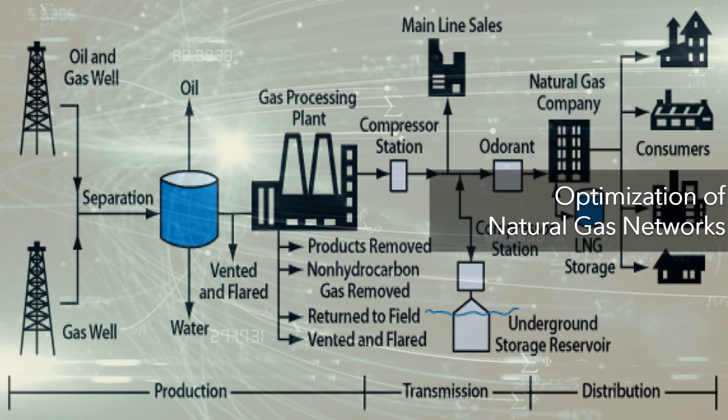Optimization of natural gas networks. There are many applications of mathematical models of optimization of natural gas system networks. Basically, for all applications the same model is used, from different points of view, which entails adjustments in the mathematical modeling. Some of the applications are: natural gas market simulation, natural gas market and system regulation, real-time optimization of natural gas pipelines, and optimization of natural gas systems.

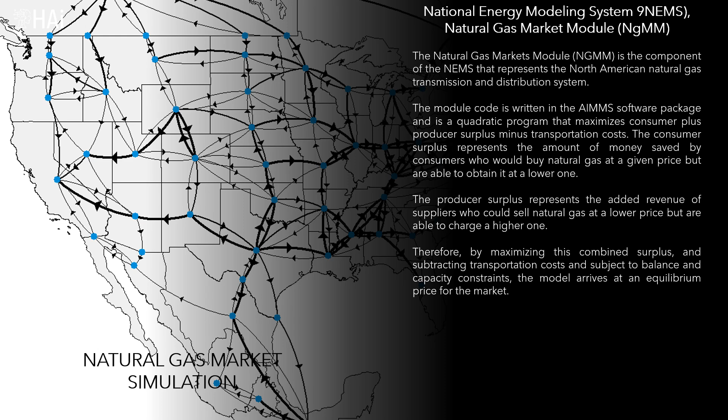The Natural Gas Market Module, NGMM, is the component of the USA National Energy Modeling System, NEMS, that represents the North American natural gas transmission and distribution system, and market. The module is a quadratic program that maximizes consumer plus producer surplus minus transportation costs. The consumer surplus represents the amount of money saved by consumers, who would buy natural gas at a given price but are able to obtain it at a lower one.

The producer surplus represents the added revenue of suppliers, who could sell natural gas at a lower price but are able to charge a higher one. Therefore, by maximizing this combined surplus, and subtracting transportation costs and subject to balance and capacity constraints, the model arrives at an equilibrium price for the market. The image presents the NGMM natural gas pipeline network.

Purdue University's SUFG, State Utility Forecasting Group, has supported experts from the Indiana Utility Regulatory Commission, IURC, since late 2001, with the goal of examining the impact of new electricity generating facilities within the gas system. The model determines the mix of purchasing, transportation, and storage decisions of local distribution companies, LDCs, which minimize the sum of purchasing, transportation, and storage costs over a 60-month planning period, subject to the following constraints.

Consumer demand at demand nodes must be met. The flow capacity of gas pipelines should not be exceeded. Storage capacity limits of storage sites should not be violated. The amount of gas transferred from one pipeline to another cannot exceed the capacity of the interconnection, and long-term purchases and dispatch contracts. The image presents the network topology of the gas modeling system.

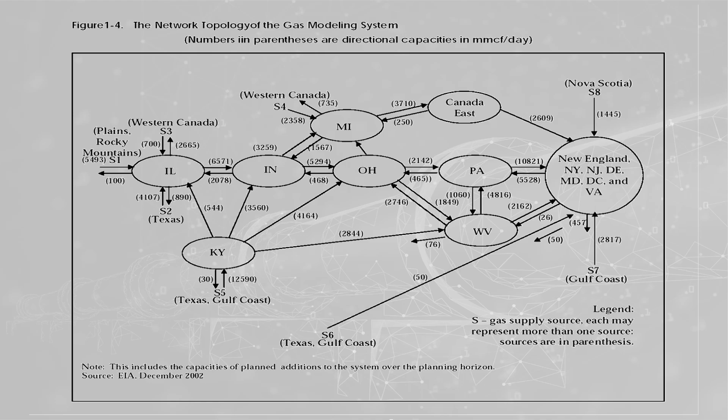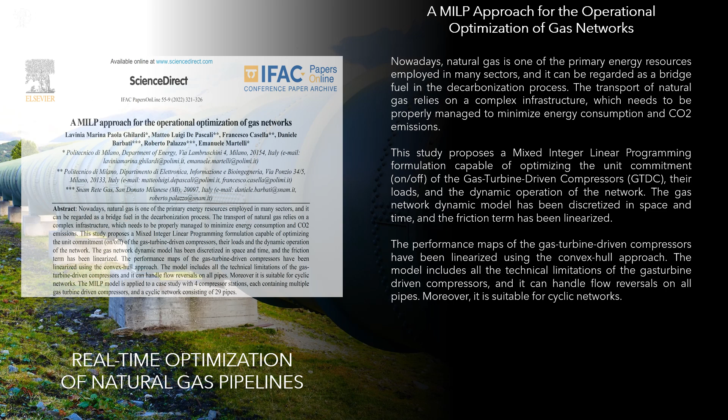Real-time optimization of natural gas pipelines. Nowadays, natural gas is one of the primary energy resources employed in many sectors, and it can be regarded as a bridge fuel in the decarbonization process. The transport of natural gas relies on a complex infrastructure, which needs to be properly managed to minimize energy consumption and CO2 emissions. The performance maps of the gas turbine-driven compressors have been linearized using the convex hull approach. The model includes all the technical limitations of the gas turbine-driven compressors, and it can handle flow reversals on all pipes. Moreover, it is suitable for cyclic networks.

The MILP model is applied to a case study with 4 compressor stations, each containing multiple gas turbine-driven compressors, and a cyclic network consisting of 29 pipes. In this case, the MILP model was used to optimize the 24 hours of unit commitment, with time resolution of 30 minutes, and sections of a maximum length of 200 kilometers. The continuous variables of the MILP are 18,816, the binary variables are 1,421, and the constraints are 43,429.

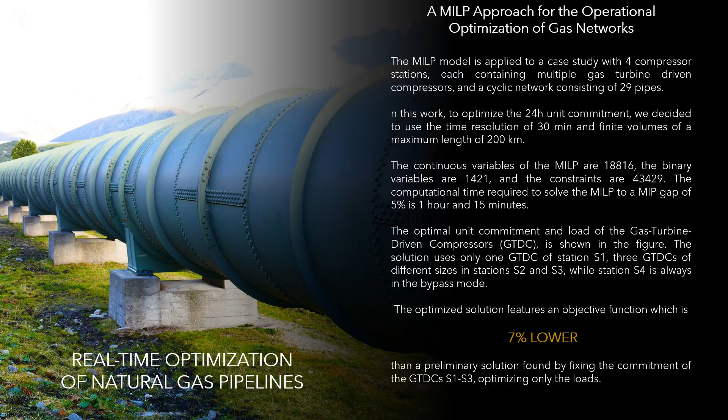The optimal unit commitment and load of the gas turbine-driven compressors, GTDC, is shown in the figure. The solution uses only one GTDC of station S1, 3 GTDCs of different sizes in stations S2 and S3, while station S4 is always in the bypass mode. The optimized solution features an objective function which is 7% lower than a preliminary solution found by fixing the commitment of the GTDCs S1 S3, optimizing only the loads.

Optimization of natural gas networks based on stochastic optimization. This model provides a review on the most relevant research progress related to the steady-state operation optimization models of natural gas pipelines as well as corresponding solution methods based on stochastic optimization algorithms. The existing operation optimization models are mixed integer nonlinear programming, MINLP, models, involving a non-convex feasible region and mixing of continuous, discrete, and integer optimization variables, which represents an extremely difficult problem to be solved by use of traditional monolithic optimization algorithms. However, no reference is made to advanced methodologies using large-scale optimization methodologies.

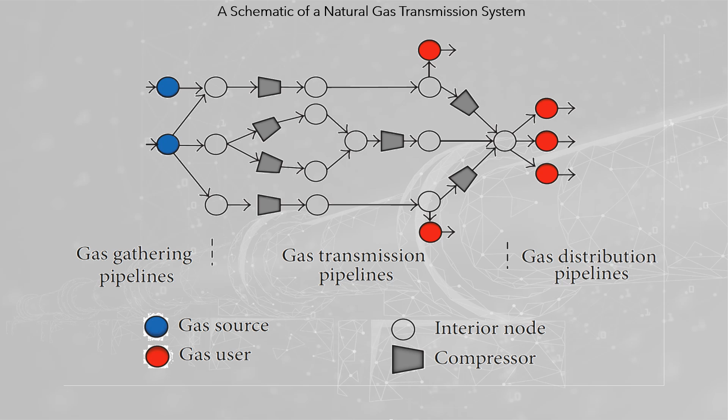A schematic of a natural gas transmission system can be conceptualized based on three subsystems: gathering pipelines, transmission pipelines, and distribution pipelines. The image shows a gas pipeline network composed of a tree and a cyclic network. The real-time model can handle differentiated electricity costs by time of day, or by load block, using this way to take advantage of low rates, or low marginal costs, in periods of electricity low load. A gas pipeline is a pipeline that allows combustible gases, natural gas, liquefied petroleum gas, to be transported on a large scale and over a long distance.

Pipelines planning and scheduling. The optimization model includes the following types of nodes: production fields, consumption center, natural gas demand nodes discriminated by demand sector, among which are industrial, vehicular, electricity generation, commercial, and residential, and ports and terminals that can receive and/or send LNG. It is associated with liquefaction and/or regasification plants.

Those interested in learning more about modeling gas piping systems are invited to watch the video. Oil pipelines optimization.

Electricity and natural gas integrated modeling. High Power integrates the following models.

High Electricity Supply Chain Optimization supports decisions in the electricity supply chain, in terms of sectoral planning and business generation. High Smart Grids Optimization supports the decisions of the various agents involved in the smart grids business. High Natural Gas Supply Chain Optimization supports the decisions of the actors involved in the natural gas supply chain, at the level of sectoral planning and business generation.

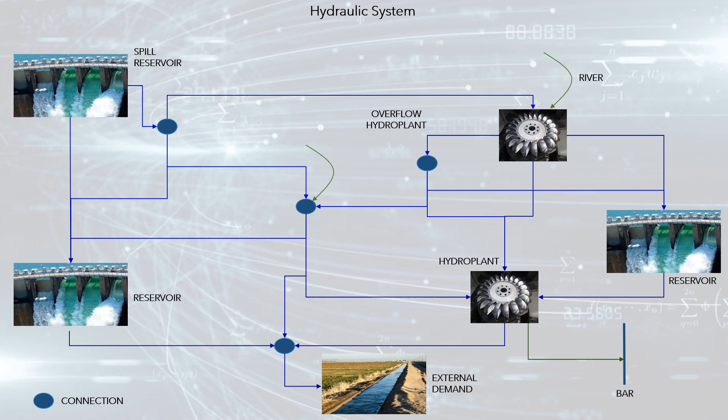The following is the topology of High Power. Hydraulic system physical modeling: High Water corresponds to a general model that includes all kinds of hydraulic components: reservoirs, hydroelectric power plants, rivers, overflow channels, connection points and pumping stations, demands like irrigation, aqueducts, environmental, industrial. Components can be freely linked to form any topology, like pumping storage systems.

Hydroelectric power plants are modeled independently of reservoirs, so plant-reservoir connectivity must be established. The regulation capacity of the reservoir is simulated in detail, so such a simulation consistently represents the dispatch of the power plants, considering their ability to regulate the multi-annual, annual, hourly water resource.

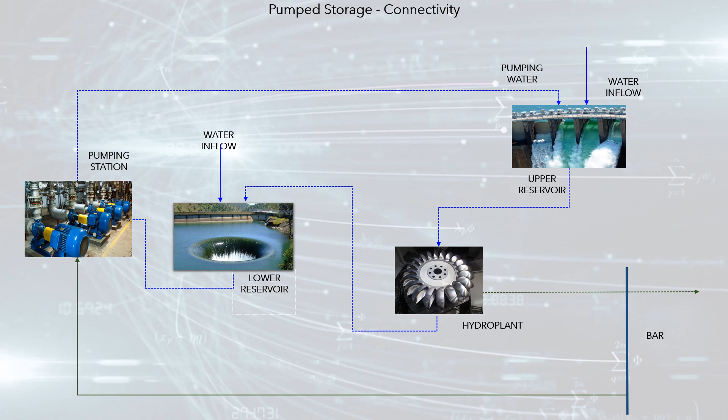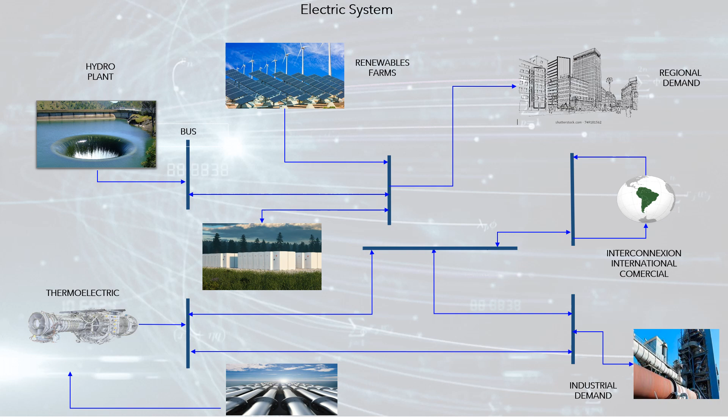Electric system physical modeling. Electrical connectivity is carried out through a network of circuits and bars that integrates different types of installations, power plants like hydroelectric, thermoelectric, coal, wind, solar, biomass, places of demand like industrial, cities, regional interconnections, and energy storages. High Power includes the simulation of several types of renewable energy sources and energy storages. For each type of electrical asset, High Power includes the exact equations for simulation.

Natural gas system physical modeling. High Gas describes the process of supply and demand of natural gas. From this point of view, its integration with the electricity system determines the economic equilibrium of electricity-gas markets.

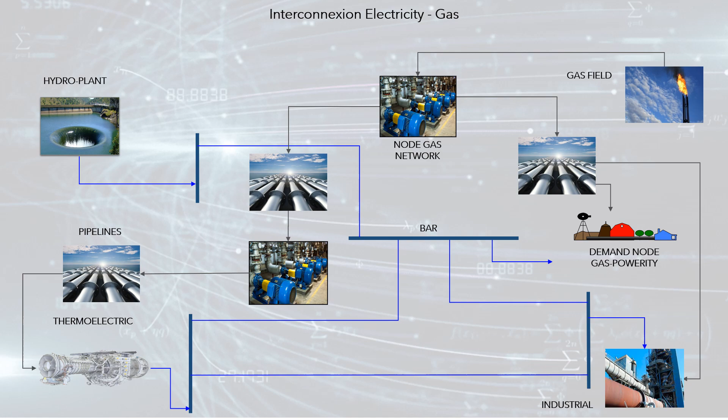The entities of the natural gas system are: nodes, which connect the gas system installations; production fields; consumption zones discriminated by sector, for example refineries, heavy industries, residential, vehicular, and commercial thermoelectric power plants; transport systems, including pipelines and multimodal transport systems using vehicles; pumping stations, which compress the gas to transport it; and ports, which receive and ship liquefied natural gas (LNG) and have gas storage capacity.

Connectivity between the electricity and gas sectors occurs through the demand for natural gas for use in thermal plants, and the substitution of demand that can occur between gas and electricity.

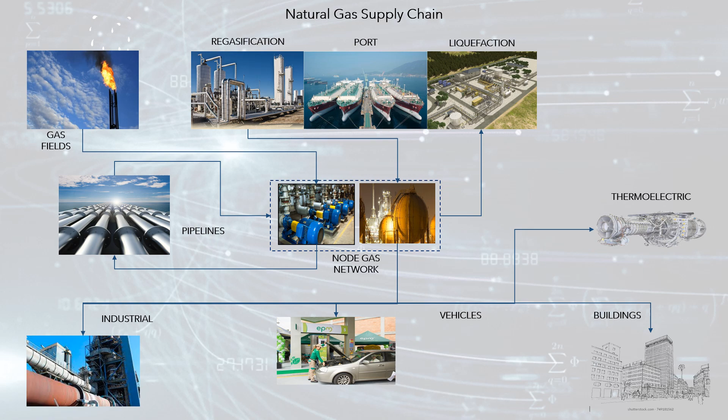High Power: autonomous optimization software for energy sector enterprises. It is an optimization decision support system aimed at agents acting in the energy sector, understood as the union of electricity, natural gas, oil, bio-renewable sources, and new non-conventional sources. For more information, interested parties are invited to watch the video High Power.

Use case: Oil Express Natural Gas Field Exploitation Planning. At the end of the last decade of the last century, Oil Express, a global natural gas company that operated several natural gas producing fields in multiple countries, asked High for support to define a natural gas field exploitation planning strategy, using highly complex mathematical models to analyze the entire decision-making environment.

The challenge was to develop a model that supported the decision-making regarding the exploitation of natural gas fields and its impact on Oil Express finances. Solution: design and implementation of a DSS for management of natural gas oil field strategic decisions, like the exploitation period.

The models included in the DSS were: electricity and gas economic dispatch simulation, optimization of the gas trading decisions, optimization of the financial and fiscal decisions, and financial simulation of the gas buyers.

Result: the SHTG model (hydrothermal and gas system), the first version of the actual High Power model. Based on High Power, Oil Express makes its decisions that produced successful results, leading to higher profits by delaying the exploitation of the gas field for an economically more convenient time, due to the non-sustainability of the market. People interested in the case can watch the video, Oil Express, Natural Gas Field Exploitation Planning.

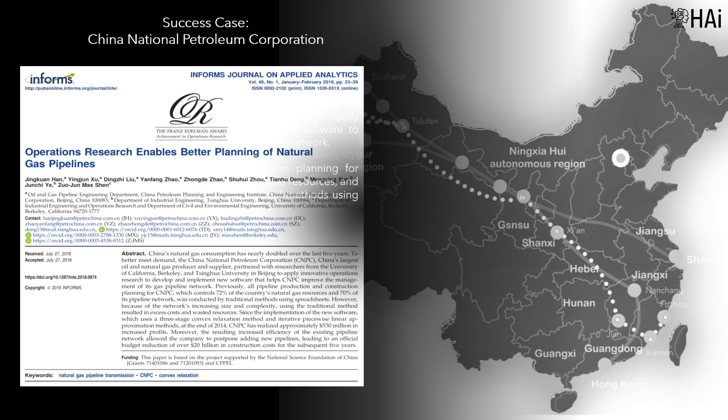China's natural gas consumption has nearly doubled in the past 5 years. To better meet demand, the China National Petroleum Corporation (CNPC), China's largest producer and supplier of oil and natural gas, partnered with researchers from the University of California, Berkeley, and Tsinghua University in Beijing to apply operations research to develop and implement new software to help CNPC improve the management of its pipeline network.

Previously, all pipeline production and construction planning for CNPC, which controls 72% of the country's natural gas resources and 70% of its pipeline network, was done by traditional methods using spreadsheets.

However, due to the increasing size and complexity of the network, the use of traditional methods resulted in excessive costs and wasted resources. Since implementing the new software, which uses a 3-stage convex relaxation method and iterative piecewise linear approximation methods, in late 2014, CNPC has obtained approximately $530 million in increased earnings from 2015 to 2017.

In addition, the resulting increase in the efficiency of the existing pipeline network allowed the company to postpone the addition of new pipes, leading to an official budget reduction of more than $20 billion in construction costs for the following 5 years.

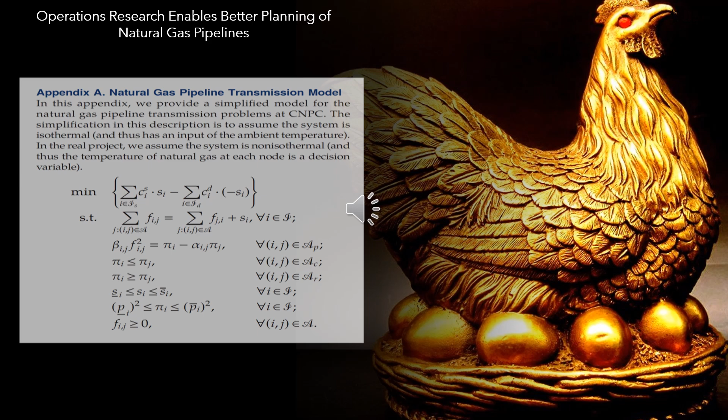The image presents the algebraic formulation of the natural gas pipeline transmission model. Without fear of being wrong, it can be said that mathematical optimization models are the goose that lays the golden eggs of China National Petroleum Corporation.

Like Herbert Simon, Hypothalamus Artificial Intelligence believes that computer-based mathematical modeling is the greatest invention of all times. Thank you for your attention.